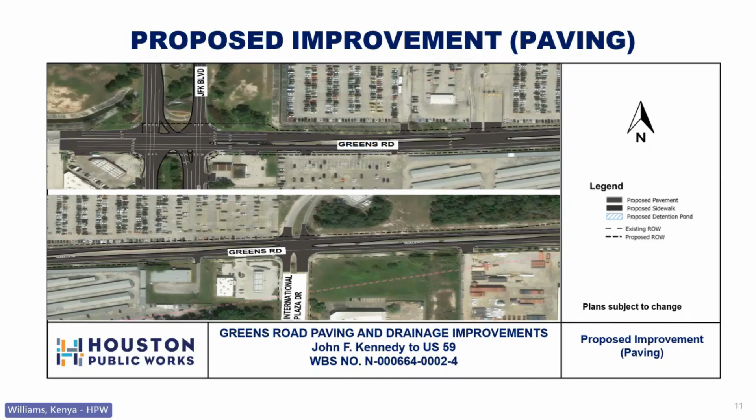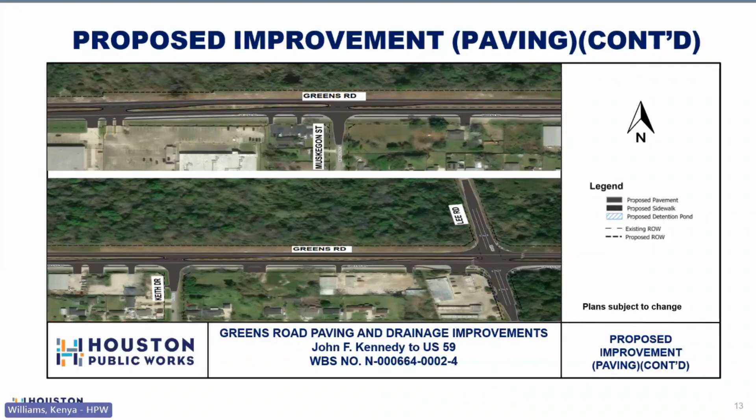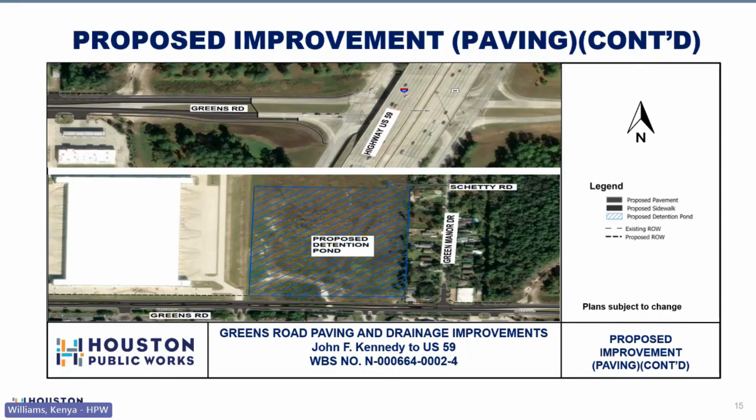All right, so this last slide here shows the end of the project just west of US 59. Also as part of the improvements, we are proposing a new detention pond just west of Green Manor and Greens Road. So this is all part of the paving improvement design.

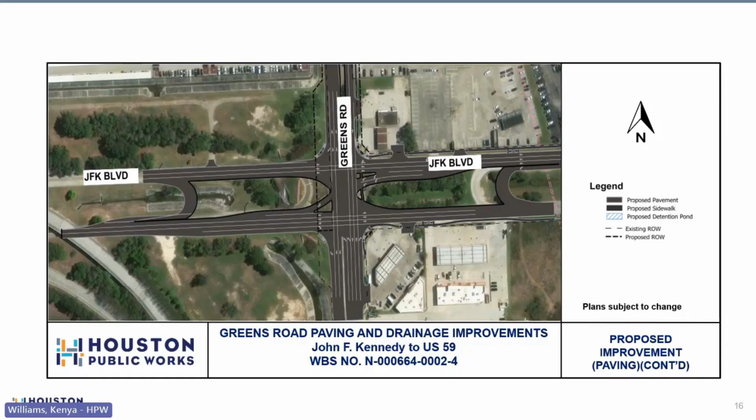Also on JFK, we are making improvements. We're going about 900 feet on each side of Greens Road to make improvements along JFK Boulevard and provide better access to Greens Road from JFK.

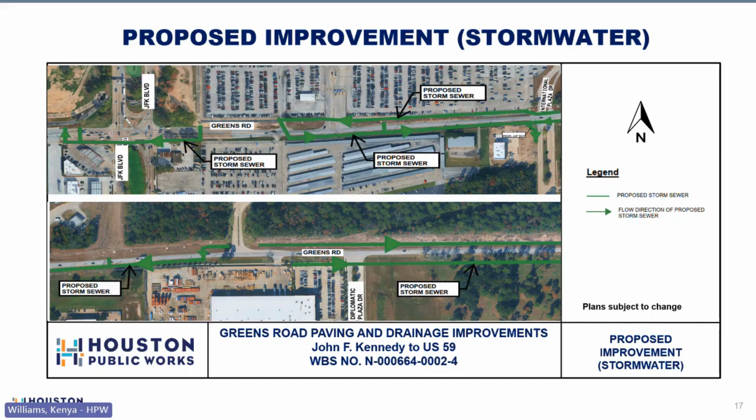The second system is just east of JFK and drains into International Plaza and ties into the existing system there. Next, the third system is Diplomatic Plaza, just west of Diplomatic Plaza, and it continues all the way to the detention pond that we saw earlier in the slide.

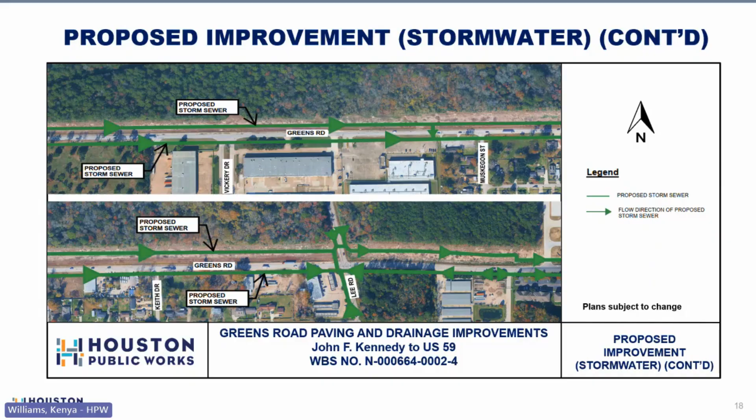It crosses Lee Road. Keep going, next slide please. That's the detention pond I was referring to. From there, it drains and ties into the existing system along US 59, which is the TxDOT drainage system. So this is the drainage system for the whole project.

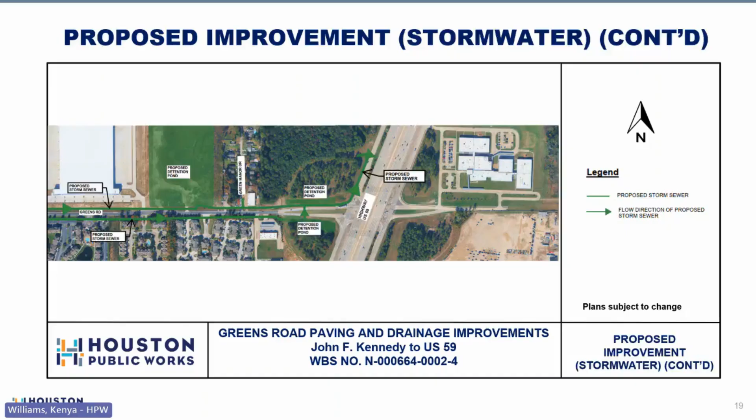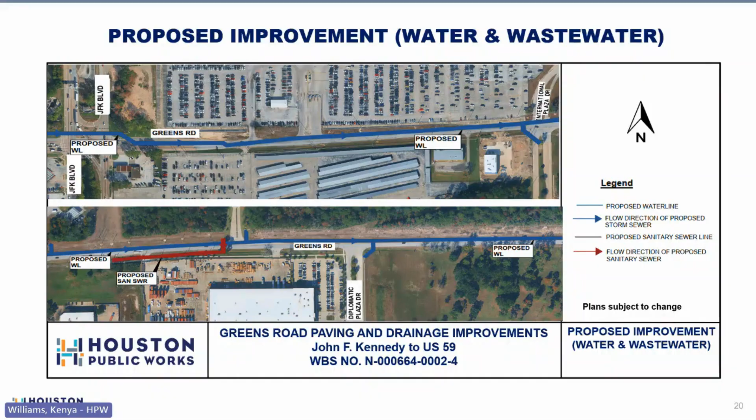The red line represents the wastewater line. We are replacing part of it, not the whole wastewater line, but wherever we are impacting it or any wastewater line is in conflict with the proposed improvement, it's going to be replaced.

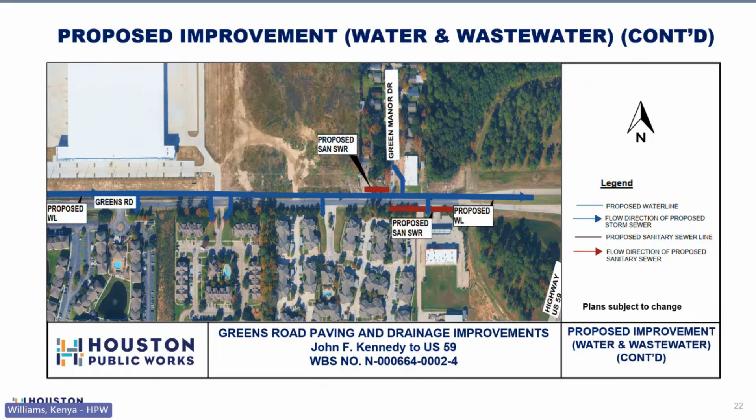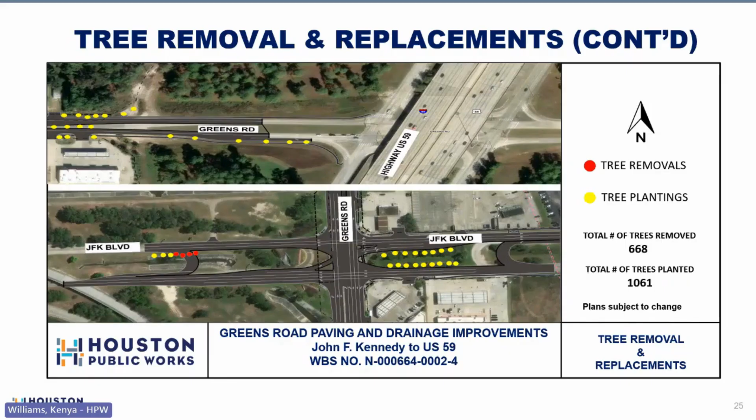Next is tree removal and replacement. The red dots represent the trees that are going to be removed along the project. Yellow dots represent the trees that are going to be added. We have about 670 trees that are going to be removed within the project limits, and about 1,060 trees that are going to be planted and installed.

This is the typical section showing the existing roadway condition. We have 1 lane in each direction, with about 80 to 100 feet of right of way.

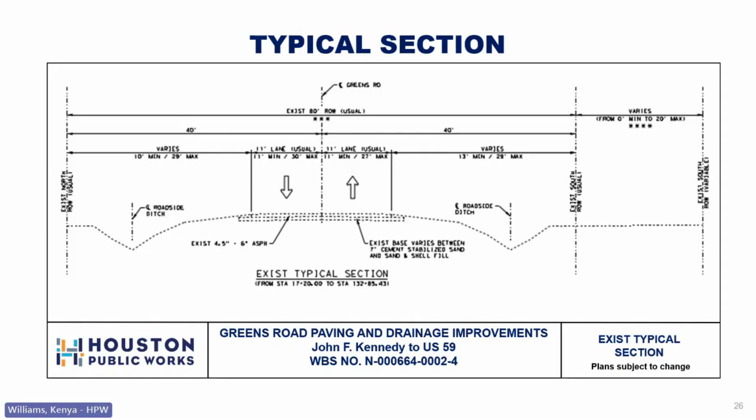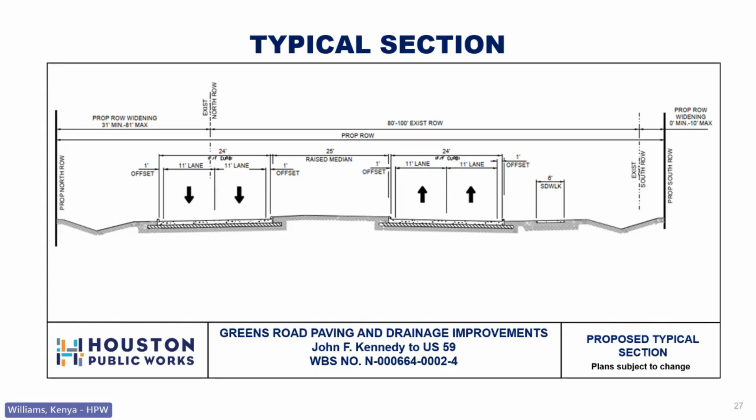With that, I conclude my presentation.

Thank you, Joseph, for those exciting design updates. Construction is anticipated to begin in fall 2026 with completion expected by summer 2029, weather and field conditions permitting.

Houston Public Works will return to host a How to Prepare for Construction meeting to help you understand what to expect and how to plan ahead.

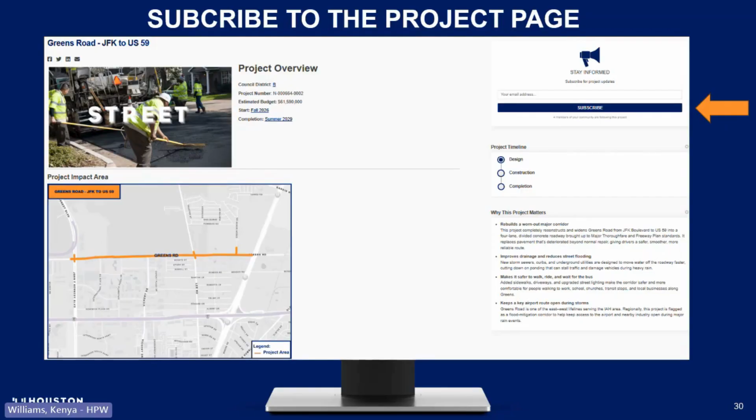Welcome to EngageHouston.org, your go-to hub for staying informed and involved in Houston's infrastructure projects. Want to view the site in a different language? Just click the globe icon in the top right corner and choose the one that works best for you. Under You're Invited, you'll find upcoming virtual community meetings. When it's time to join, just click the link.

It goes live automatically. Click on any project page to explore details like budgets, timelines, maps, and why each project matters. Scroll down for construction updates, downloadable plans, and more insights about what's happening in your community.

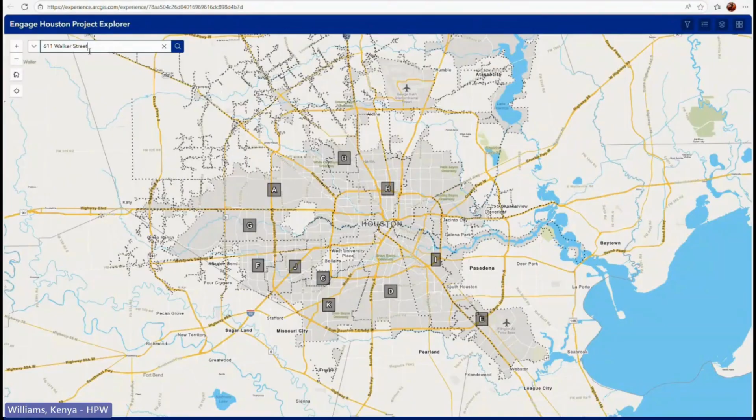Here's one of our most powerful tools, the interactive map. Simply enter your address to see projects happening in or near your neighborhood. It's an easy way to stay connected to improvements right where you live.

Have questions? Visit the FAQ page or use the Engage Us tab to get in touch with our team directly. Use the top menu to explore projects across the city, or type a project name right into the search bar to find what you need fast.

Want full access? Click Register, create a username, set your password, answer a few quick questions, confirm your email, and you're in. Welcome to EngageHouston.org, Houston's award-winning platform where transparency meets progress, and your voice helps shape the city's future.